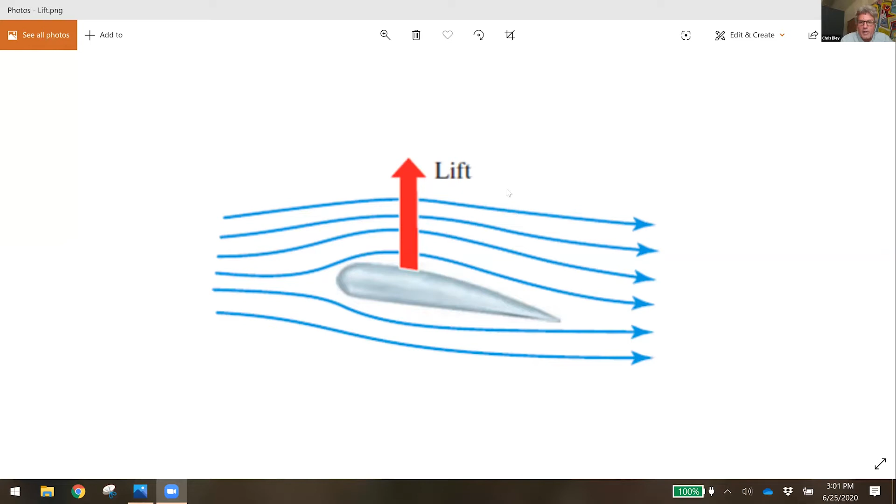Thanks, Chris. Everybody hear me okay? Can everybody hear me? Yes. Okay, good. My screen is not sharing. Can you see my screen? Yes. Great.

Hi, everybody. Welcome to the winding down of Thursday afternoon drone camp. I know everybody's probably a little saturated by now with all the drone stuff we've been doing. So I'm going to be very brief. I have no data to present or results to show you. I just would like to give a little overview of fixed wing aircraft and vertical takeoff and landing aircraft in particular, because we really didn't have time to address that much in the equipment roundup day that we had.

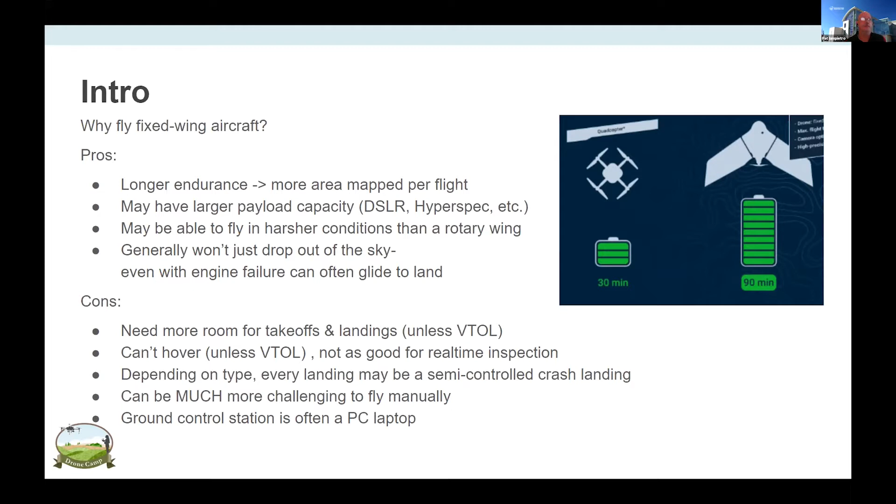In some cases, fixed wing aircraft are, I would say, more likely to require a PC laptop as opposed to a mobile device like a phone or a tablet as your ground control station. So there's a couple different main types of fixed wing aircraft. There's the flying wing design, which we saw the eBee, and the one to the right of that in the picture is the BirdsEyeView FireFLY 6 Pro, basically just a wing shape. The Wingtra is another sort of flying wing type design. And then there's standard fuselage with fixed wings like the Trinity F90 Plus that we're going to hear about in a little while.

When it comes to vertical takeoff and landing, there's two main strategies that the aircraft use to do that. One is a convertiplane or a tilt rotor, where you have rotor blades that actually can rotate. For example, in the FireFLY Pro, there's a strut that goes through the middle of the fuselage, and there's a little sprocket and chain drive attached to a motor that rotate the forward props to a forward position for forward flight. So you can take off straight up, and then when you want to transition to forward flight, you push a button on the controller, and those props rotate around and carry it forward. And landing you can do in reverse.

Another notable thing about the FireFLY Pro is that it actually does have landing gear. It has little wheels, and they retract when you take off and then come back down again when you land. So that's the convertiplane or tilt rotor type of VTOL. Another strategy is called a tail sitter. That's an aircraft that you set up on the ground, pointed straight up with its props straight up, and you hope it's not too windy, so when you walk away from it, it doesn't just blow over. And then it will take off straight up like a helicopter and then transition to flight, not so much by rotating the props, but by changing the control surfaces so that it will go forward and fly like an airplane.

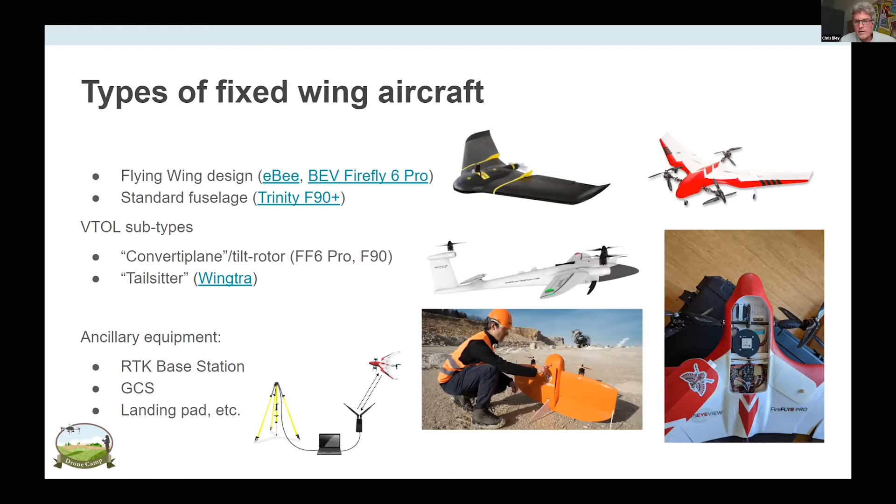Today I'd like to tell you about MBARI's interest in using aerial platforms such as fixed wing drones to conduct marine science. Some of the applications and motivations for MBARI's interests include bio-oceanographic processes, such as long transect time series studies, tracking harmful algal blooms, studying animals like jellies, fish, birds, and whales. Also ocean and atmosphere interactions. Other interests include spotting entangled wildlife like whales, pictured down below, and water chemistry.

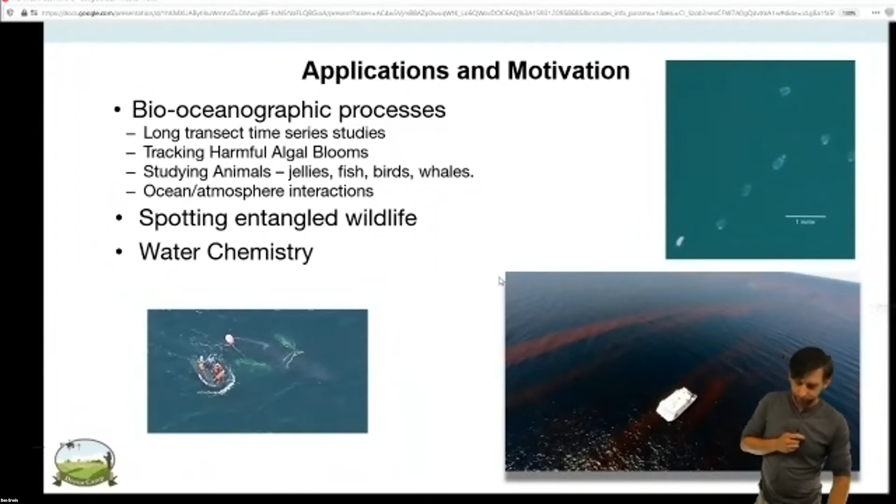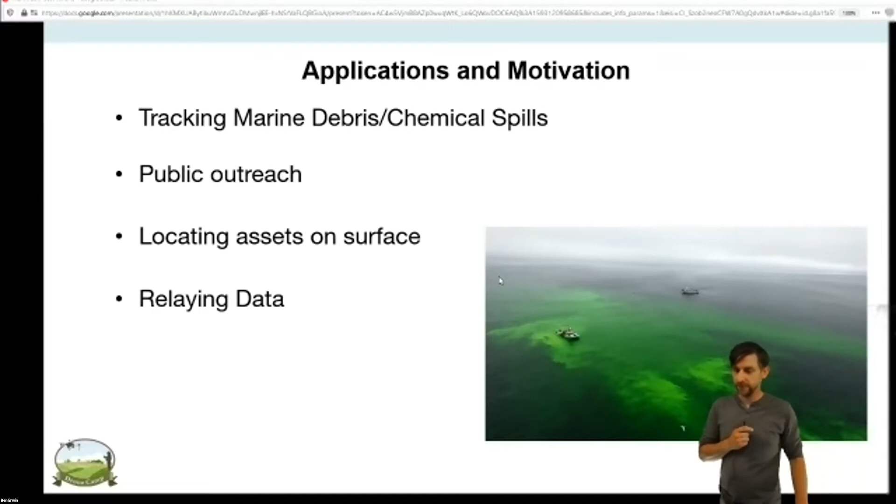There's some tracking of marine debris and chemical spills, public outreach, and taking nice images, locating assets on the surface, like our autonomous underwater vehicles. When they resurface, we can use drones to spot them and recapture them. And also using drones as a data relay for deployed assets like moorings and wave gliders.

Some of the requirements that we've come up with is a system that needed to have suitable payload for common imaging gear. It needed to have a functional range of around 70 kilometers, which would get us across the bay and back, at least Monterey Bay. It needed to have appropriate launch and especially recovery options while at sea, and accessibility to flight data and payload control.

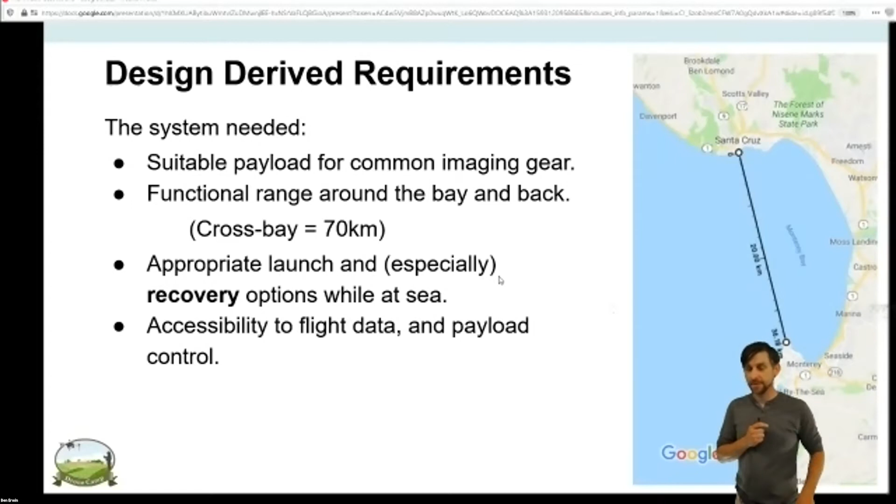The solution we came up with after trialing some systems was to build a robust kit plane from a very cheap online source. We chose the Believer platform. The cost of the full build of the Believer is around $2,000 and takes around 12 hours of build time. The maximum flight weight is approximately 5 kilograms, with 1.5 kilograms of that being payload.

So during our testing, some of the measured performance we saw was with a weight of 4.5 or 4 3/4 kilograms, we estimated we could get about 85 kilometers on a 16 amp hour battery, 6S. The average airspeed during those testing phases was around 20 meters per second.

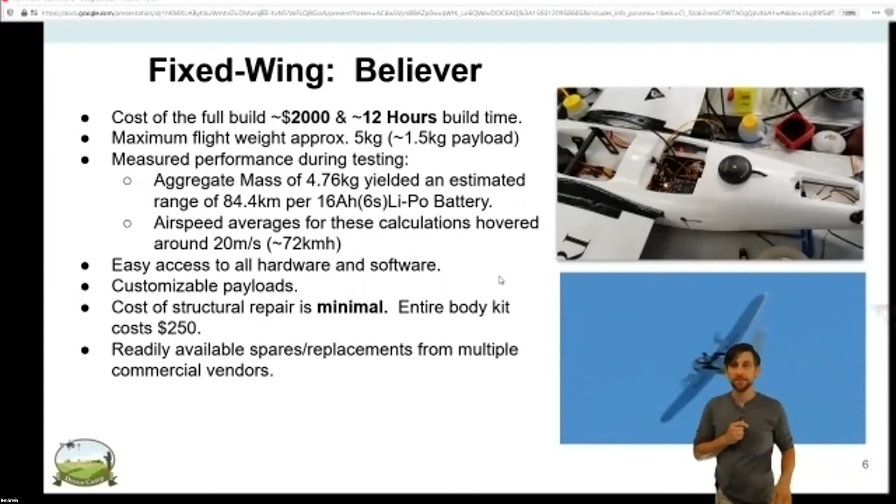The Believer has really easy access to all the hardware and software. It has customizable payloads. The cost of repair was minimal at around $250 for the entire body kit. And the spares and replacement parts are readily available from multiple commercial vendors. The basic electronic infrastructure of the Believer is a standard PixHawk and MAVLink workflow with extra connections for power and payload interfacing.

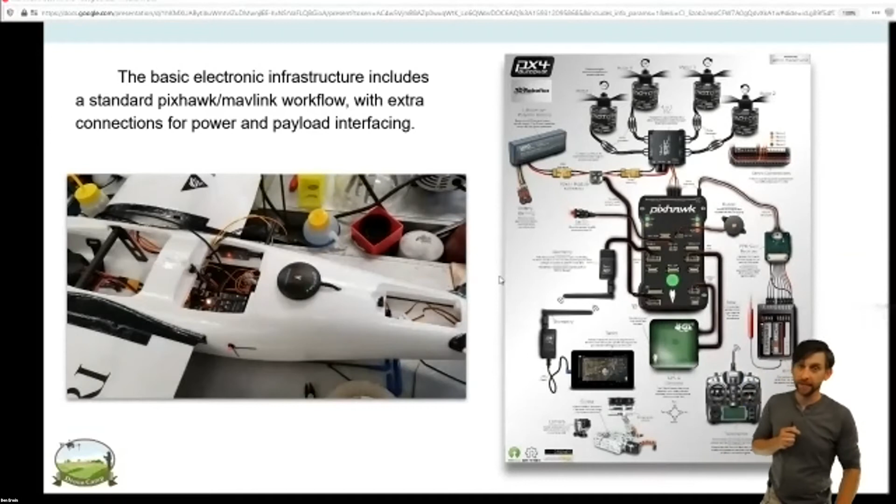Some of the payload options that we're looking at using are the Sony cameras, the Sony A6000 series, and the RX1 R2. Of course, RedEdge multispectral imagers, hyperspectral imagers. We're looking at using directional signal tracking for locating assets. We're looking at using gimbaled HD cameras and directional antennas as well there. Also hardware such as computers for creating the data relays with our deployed assets. And then finally, thermal infrared imaging.

The control system consists simply of a Taranis X7 open source radio controller. It operates on 2.4 gigahertz and has bidirectional data and configurable switches and pots and joysticks and all that. The software we use, we've actually been trying a few, but it's compatible with any MAVLink control software such as Mission Planner, QGroundControl, Pix4D, and DroneDeploy.

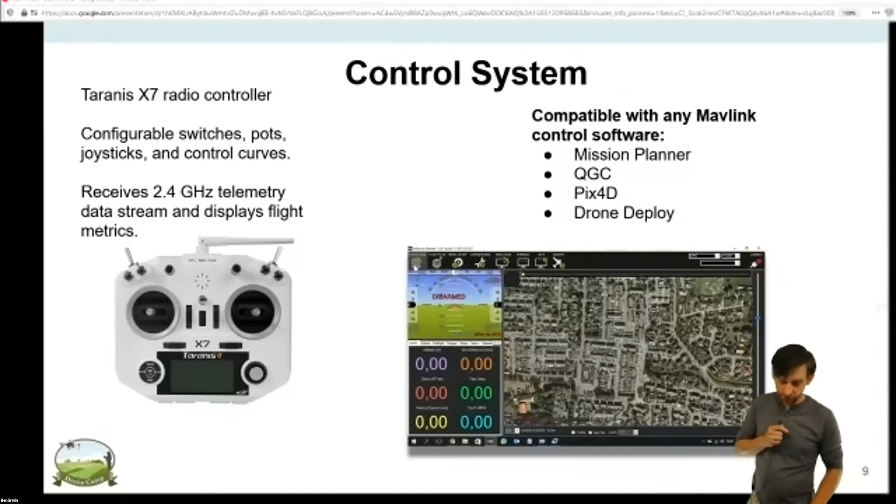Some of the future developments that we're working on with our next series of aerial platform, the Believer 2, are optimized internals and electronics for more efficient flight, at least energy usage during flight. We have a waterproof imaging port seen here with this RX1 R2. There's a vibration mount that connects to that for the Sony cameras. We have an HD first-person video transmitter. We're expecting increased range with a ground control station and directional tracked antennas. There's a pingRX ADS-B detect and avoid system we're about to try.

Deployable parachutes, the ability to support multiple imagers for simultaneous data acquisition. This means being able to correlate infrared data, for instance, with RGB data or a high resolution camera. And then the possible addition of using lithium-ion battery packs as opposed to lithium polymers for increased energy density on the plane.

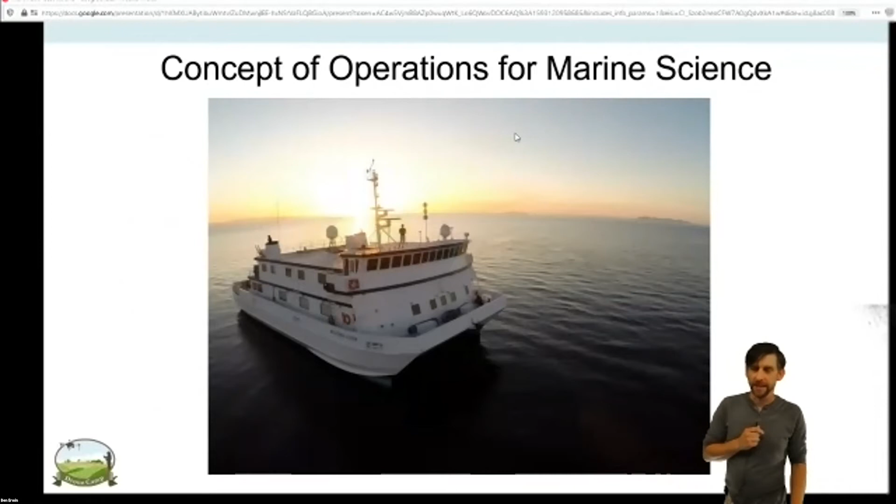Some of the concepts of operations for marine science, because it is a unique environment. How do we deploy a plane from a small boat or a ship? Well, the process begins with planning. Are the targets near shore or are they offshore? If they're near shore, they don't necessarily require a chase boat. If they are offshore, they do require a chase boat. For us, if we're operating within the marine sanctuary here, we have to submit a flight plan to NOAA. And then, of course, we launch the plane, perform our flight operation, and then a choice of landing.

And so based on whether we're flying off of a ship or the small boats, we can land with this plane, either belly landing in the water. Since it's waterproof, we can just go pick it up, deploy a parachute and use the parachute as a grab point, or we can fly it through the A-frame of the Fulmar, which is pictured here, this is our ship, into a net that we deploy onto the A-frame, just fly it right into the net.

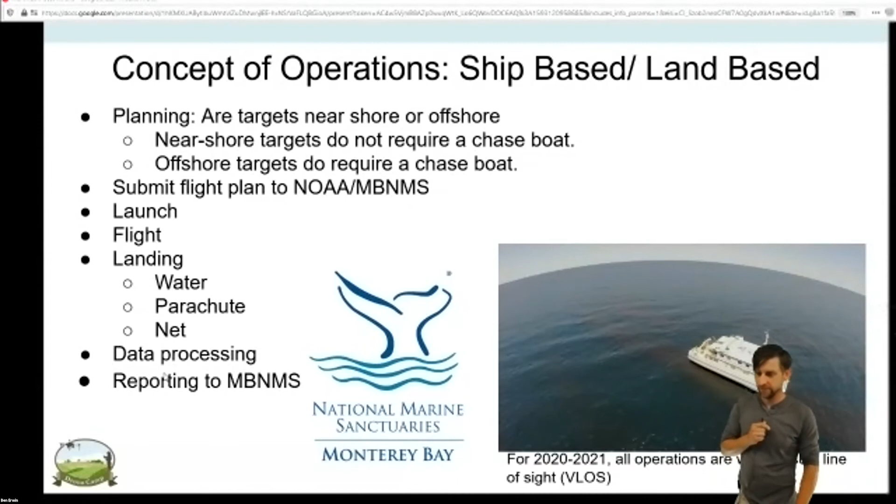After, of course, the flight operations, we conduct data processing, download the data, and then create science from that. And then finally, at the end of the year, the sanctuary requires us to submit a report based on all of our flight information and give them access to that. And that's really what we have so far.

Yeah, great, Ben. That was a really good presentation. I want to learn how you put yourself as a true presenter in the corner there. That's awesome. Oh, I can teach you that later.

Yeah. So I have a couple questions, mainly because we do a lot with airspace management, and you said ADS-B, detect and avoid. Right. So maybe tell me something about that. Yeah, so built into Mission Planner is a detect and avoid sort of prototyping that they've started to implement. And so a company called Ping ADS-B, I can find the link and post it later. They've created a low cost, it's about $200 for this receiver.

It receives signals only from ADS-B sources. So if you have a Cessna that's transmitting on the frequency and it detects it on board, I think the processing happens on board the Pixhawk, but if it breaches some geofence, it can perform some maneuver, whether that's a parachute deployment or an avoid. It can certainly do that.

So we're still looking at how well that works, but we've tested some of it on the ground. We've seen the planes come into the Mission Planner map, and we can do a simulation where we can see the plane likes to avoid it, so it performs its safety maneuver. If you check the forums online, there's some question as to how reliable it is, but there's certainly work being put into that.

Hi everyone, how are you guys doing? So everyone can see the screen?

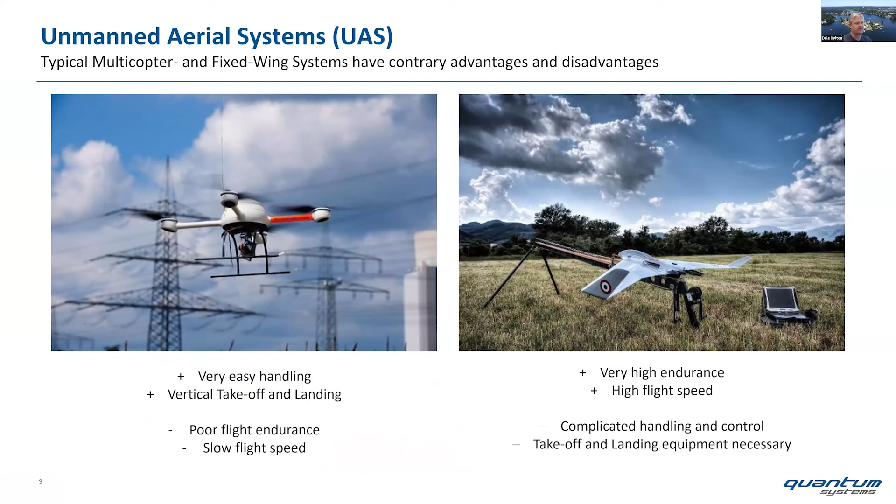Yes. Okay, awesome. So Quantum Systems is a VTOL or UAS manufacturer, larger frames. They are all made in Germany, which is a little bit different than many of the other drones out there. The idea was to take the ease of use of multi-rotors and the long range capabilities of fixed wing drones, and get rid of all the bad stuff of those to create a platform that is easy to fly. So we get easy handling, vertical takeoff and landing, long endurance, and high flight speeds.

I'm going to just do a quick video here since it seems the embed didn't work. Give me a second. I don't know if that's showing full screen or not? It's not. Okay. Why? There we go.

So from a technical standpoint, the Trinity has a flight time up to 90 minutes. In reality, it's actually over 90 minutes, but we conserve some of that energy for landing and returning to home. It's approximately a 10-pound aircraft. It cruises at 17 meters per second, or roughly 38 miles per hour. It can cover up to 700 hectares, around 1,700 acres, in a single flight.

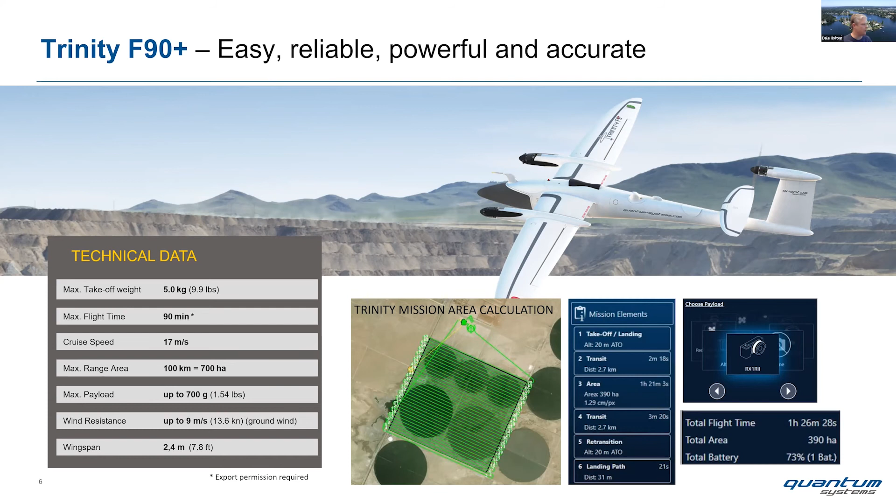A couple of things that it includes is anti-collision lights. It is PPK capable altogether, and as our last presenter was indicating, the uAvionix ping is integrated into this system as well. It is very great for capturing anybody who's transponding, which every aircraft is supposed to be doing now. But sometimes you do run across helicopters who are not transponding, and they're flying actually at like 300 feet.

So you do have that controller capability to be able to take control, rather than the eBee, which stays in the box. It does have the ability to actually control without crashing the drone. Like you can't push the stick so far down that the drone's going to actually go straight down and crash, or turn to the left and flip upside down. There's no barrel rolls or anything like that. Primarily, it is flown using the flight planning software.

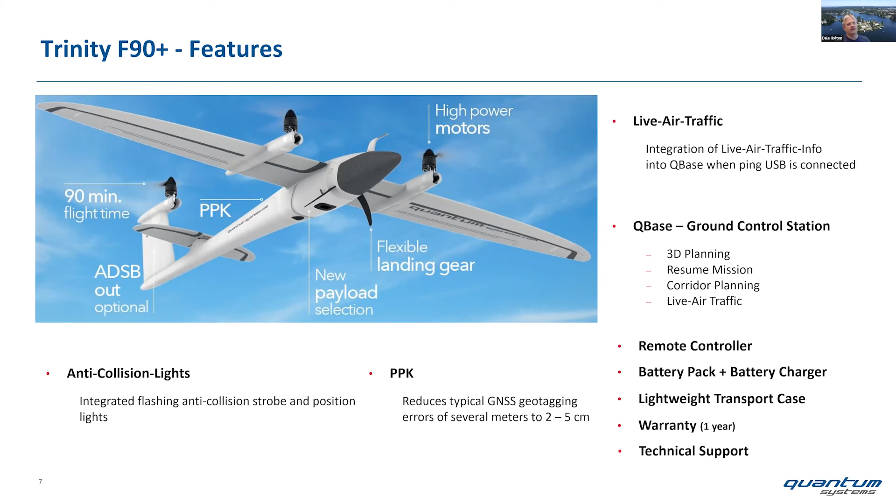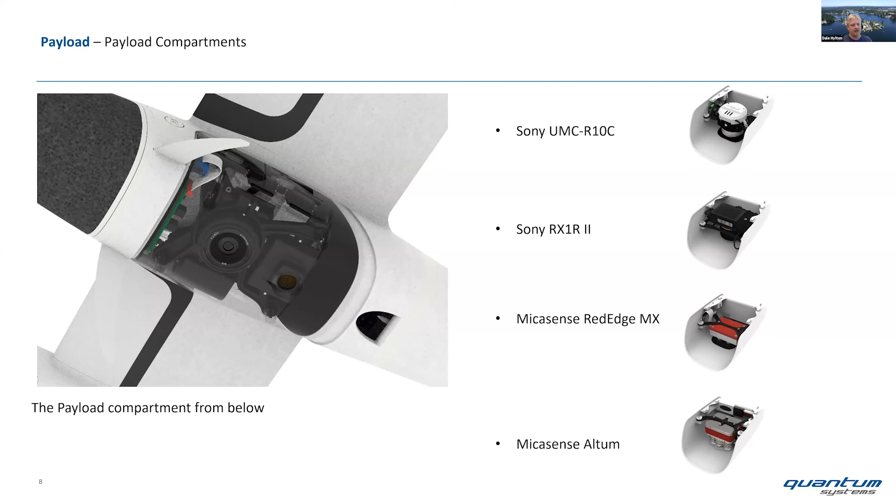It weighs approximately, in the case, approximately 40 pounds with one battery in there, and less than 50 pounds with 2 batteries. The primary payloads that are integrated at this time are the Sony UMC, which is a 20 megapixel camera, the RX1R II, which is a 42 megapixel camera, the MicaSense RedEdge-MX, and the MicaSense Altum. And there's also a dual payload capable with the Sony UMC and the RedEdge-MX, which allows you to capture high resolution RGB imagery along with that multispectral imagery.

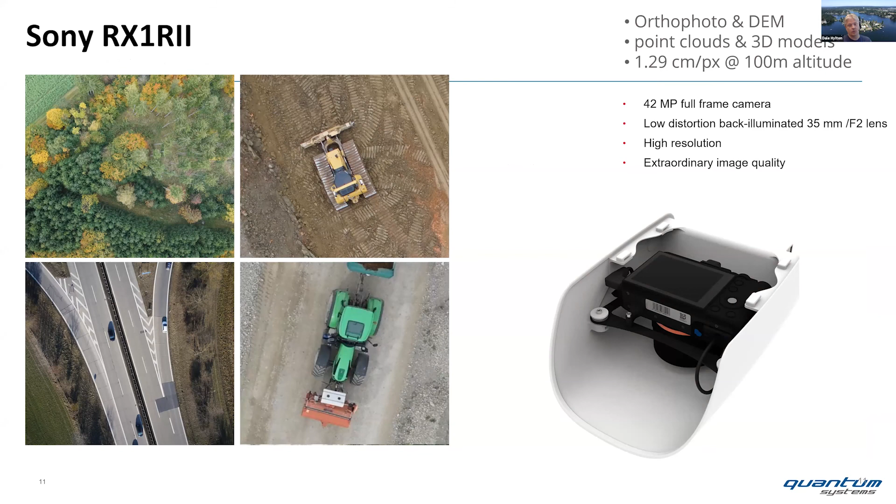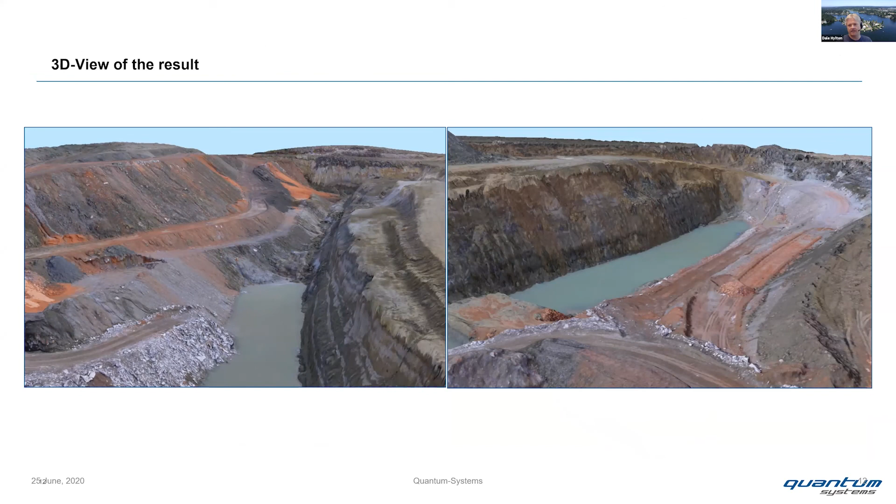You get a 2.6 centimeter resolution at 100 meters altitude with the UMC. RX1 is 1.2 centimeters, so it's quite high resolution. I do have to say that the amount of data that you collect, each image is approximately 35 to 45 megabytes. So as you're flying large areas, you do get a lot of data. I flew an area down in Florida for an airport, and we had a 75-minute flight, and that ended up with about 55 gigabytes of data in a single flight.

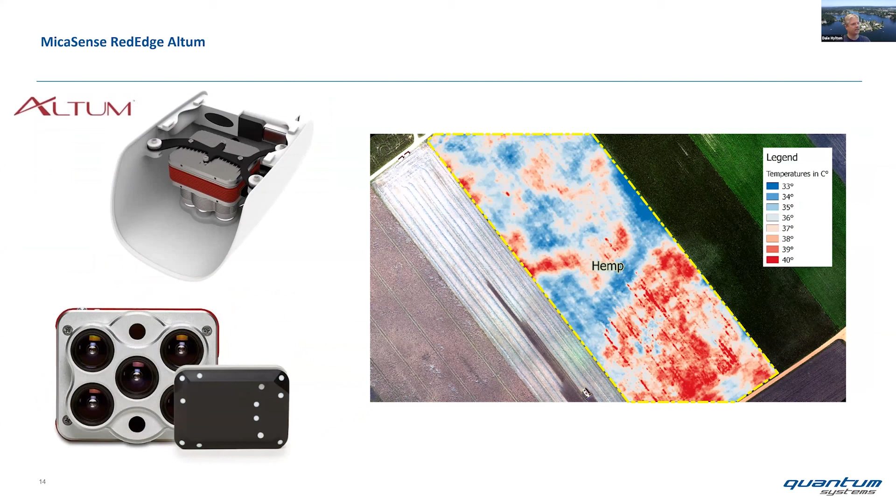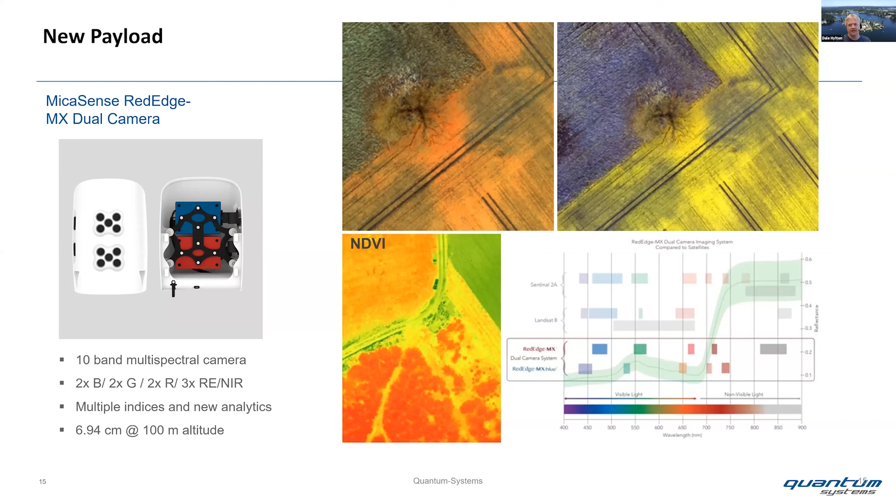You do have the RedEdge-MX, and a lot of you guys are using these multispectral sensors already. And then you have the Altum, which adds that higher resolution camera and sensor, including the thermal capabilities. And then just recently we added in the MicaSense RedEdge Dual that's fully integrated into the system. And I know a lot of you guys are interested in this for coastal reasons. Actually 2 days ago, I had NOAA up here in the Seattle area where we were doing some training on the Trinity. So they are definitely interested in having this kind of information themselves. And we had a number of discussions about how to fly off boats.

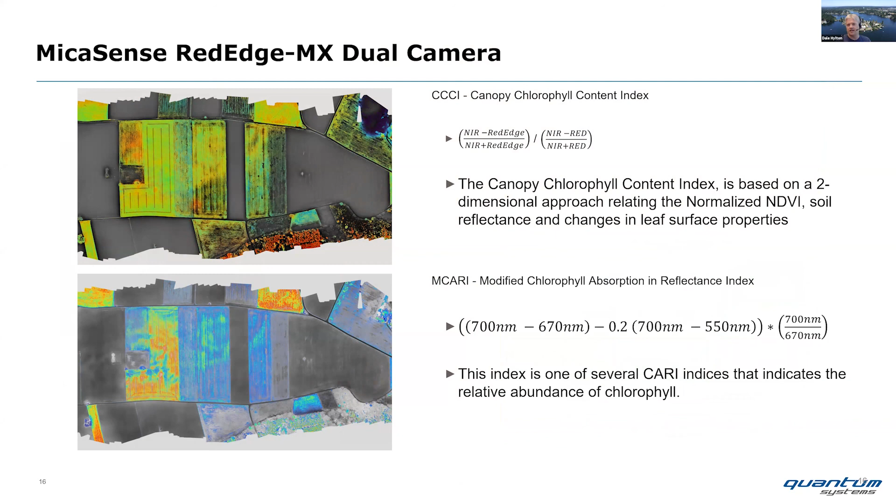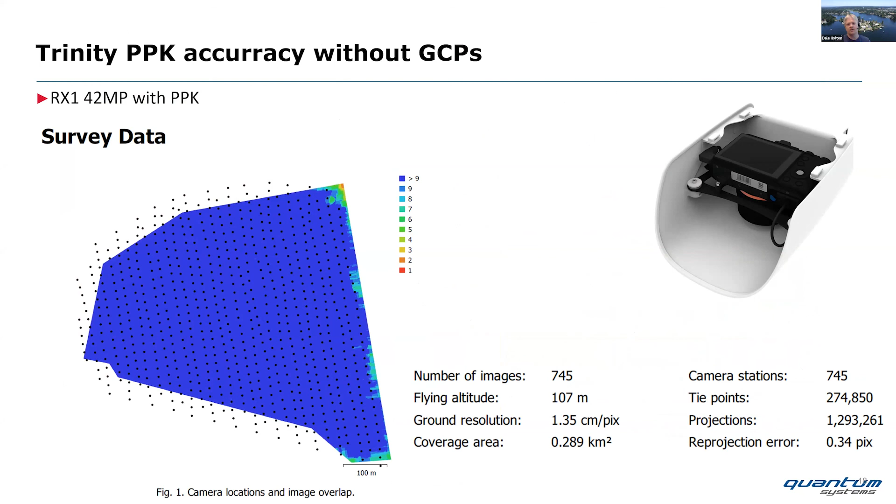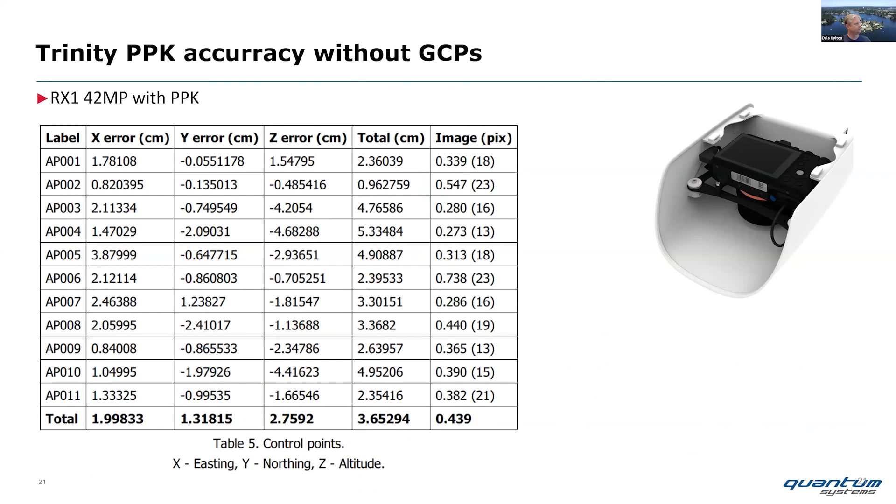I'm just going to flip through some of these quickly, but there's proof that you can get high accuracy information without actually using ground control points. And again, if you download the slides, you can dive into these a little bit more. The big thing about the Trinity is you have that maximum flight time of 90 minutes. You have easy to use payloads, high quality RGB, high quality multispectral imagery, and then easy to take off and land, and high wind resistance compared to other VTOLs.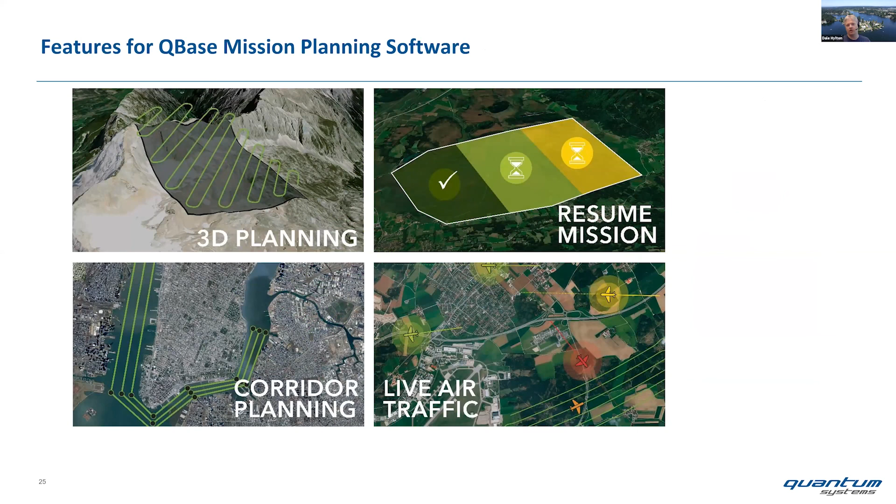In terms of flight planning, it's super easy. If anybody's ever flown an eBee, they'd know eMotion. Even some of the mission planners are similar. There is a 3D element to this. There's a recent update for QBase that added in the Imperial system as well. You basically pick your aircraft, you pick your payloads. Generally, you don't have to mess with the speeds, but you can fly anywhere from 17 meters per second to 20 meters per second. So if you need to get something done a little bit faster, you can do that. Or if you have higher winds, the drone will compensate for that.

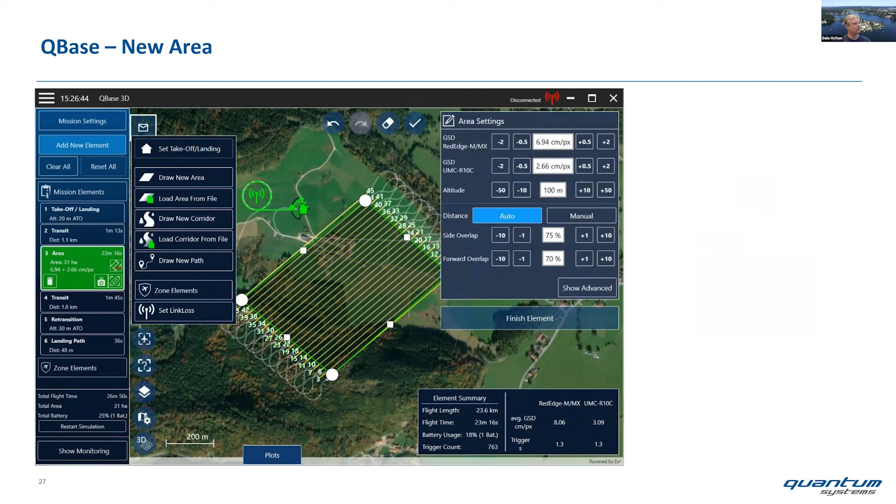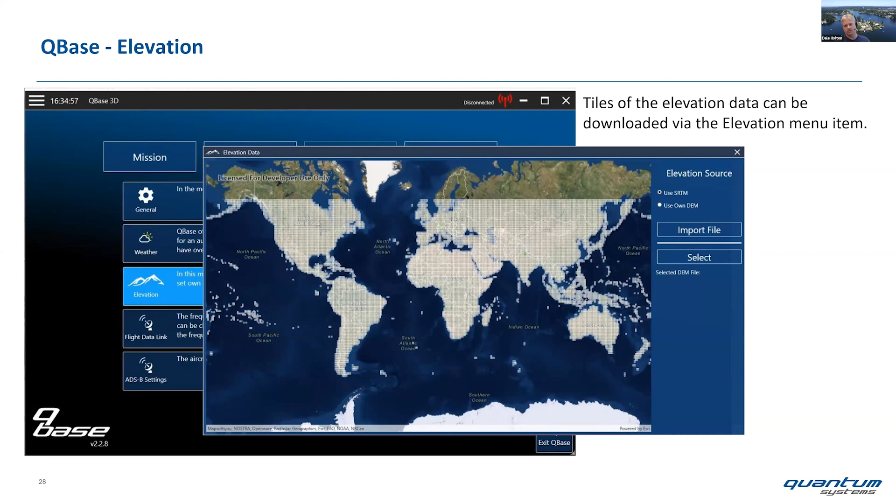It also includes SRTM data for those areas using Esri up to 60 degrees north and then all the way down to South America. And that info is really good for areas where, especially in California, you could easily fly the coastlines and have it step up for each leg it goes up. You do want to fly parallel to the areas, otherwise the legs won't actually follow that. You can easily program in areas as well as corridors, and you can fly multi-leg sets, meaning you can fly an area, then a corridor, then an area again, or you can fly multiple corridors.

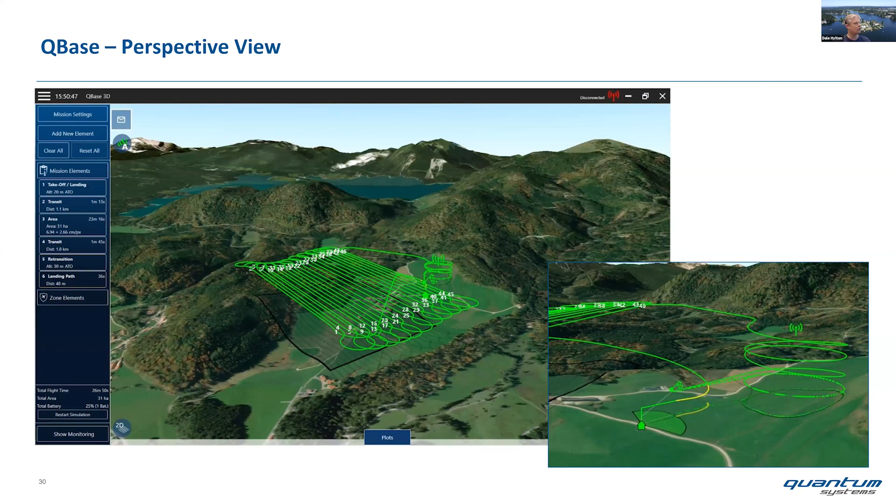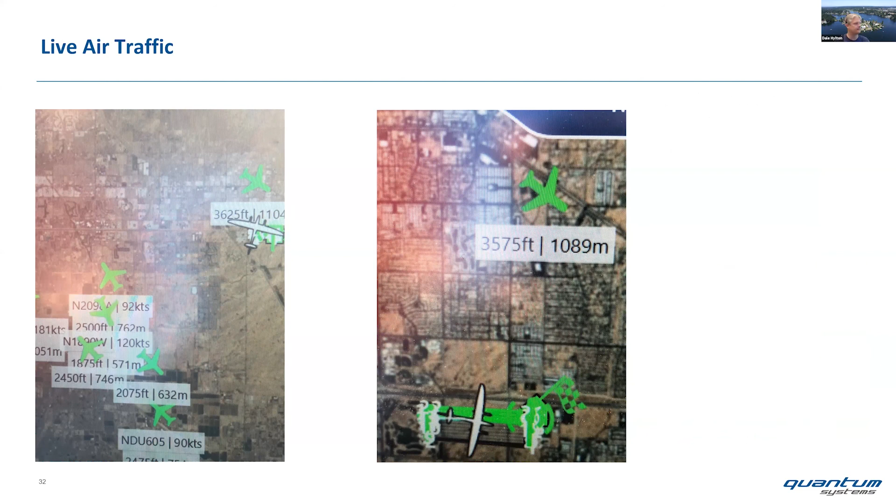It has weather forecasting built into the software that helps you with your mission planning. And then this is an example of the ADS-B receiving that you can have. There are options also for ADS-B out, if you have the proper authority to broadcast that information; you'd have to get the clearance from the FAA for that. And again, you have PPK capabilities, and that also works with the multispectral imagery as far as processing.

And that's all I had for that. Would be happy to answer any other questions too.